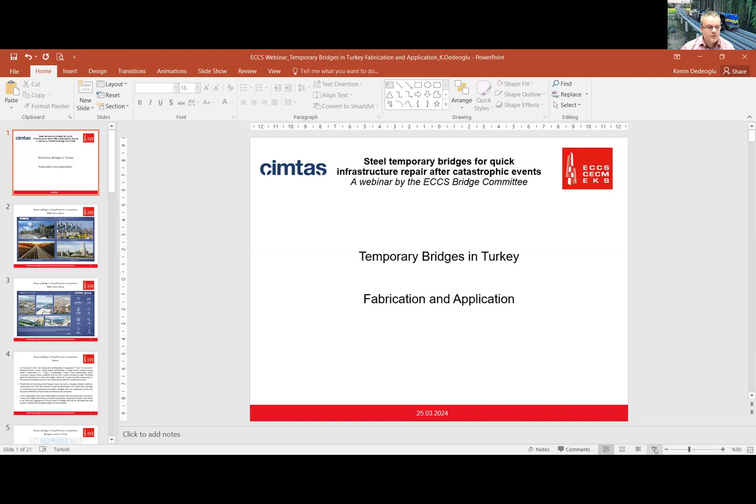Yes, I'll start my presentation now. Let me share my screen. Can you see it now in presentation mode? No, it's the normal mode, not the presentation. Yes, now it's okay. Okay.

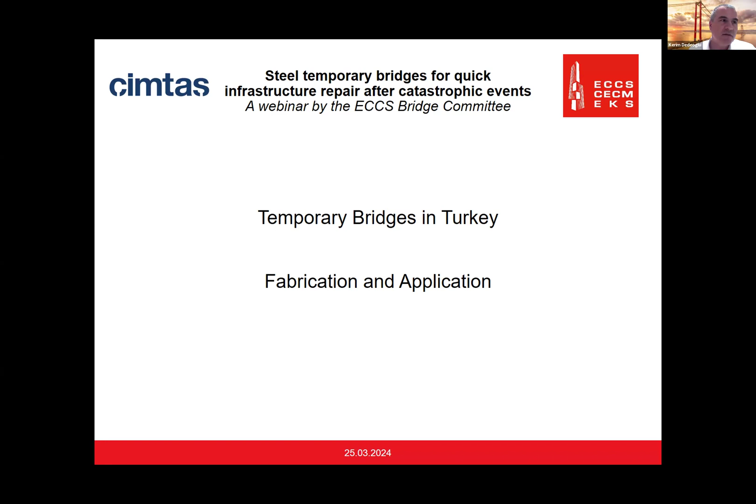Before starting my presentation, I would like to give you brief information about Enka and Çimtaş Group. Çimtaş is the subsidiary of Enka, which is one of the largest and oldest EPC companies in Turkey. Enka is active in oil, gas, and chemicals, power infrastructure, and building works. Enka was established in 1957 and completed hundreds of projects in 53 different countries with more than 60 billion USD historical contract value. Enka ranked 53rd in the ENR top 250 contractors list last year.

Çimtaş was established in 1973 as the largest subsidiary of Enka, with five companies and 7 fabrication shops in Turkey and China, where Çimtaş Steel is the flagship company of the group. We have 5,000 employees worldwide, and total fabrication capacity is around 380,000 tons per year. We are offering engineering, procurement, fabrication, machining, modularization, erection and installation services to top tier customers all around the world.

Çimtaş is also the fabricator of the 1915 Çanakkale Bridge, which is the longest suspension bridge in the world, which you see in the photo behind me.

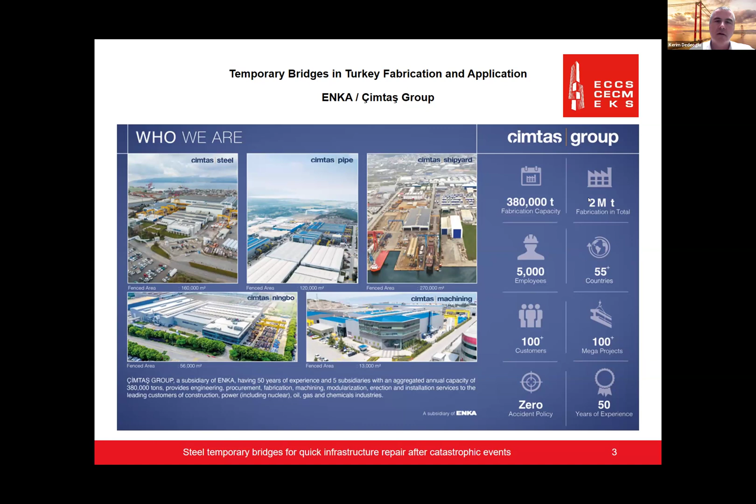On February 6th, 2023, 2 consecutive earthquakes of magnitude 7.7 and 7.6 occurred in Kahramanmaraş, Turkey, as Mr. Yener Güreş also mentioned in his presentation. These largest earthquakes in recent history caused varying levels of destruction in 11 cities in southeast Turkey. Those earthquakes occurred in harsh winter conditions, and the first of them occurred at night,

reminding again the importance of roads and bridges, which are of great importance especially for first aid, first response, emergency response, and logistic support in the days following catastrophic events, not only earthquakes but also floods. In the following slides, I will also give some information about the big floods in Turkey.

Floods, which are becoming more frequent every day due to changing climate conditions, cause great loss of life and property, as well as earthquakes, and cause heavy damage to infrastructure and superstructure systems. Bridges built over waterways are the first structures to be damaged by floods.

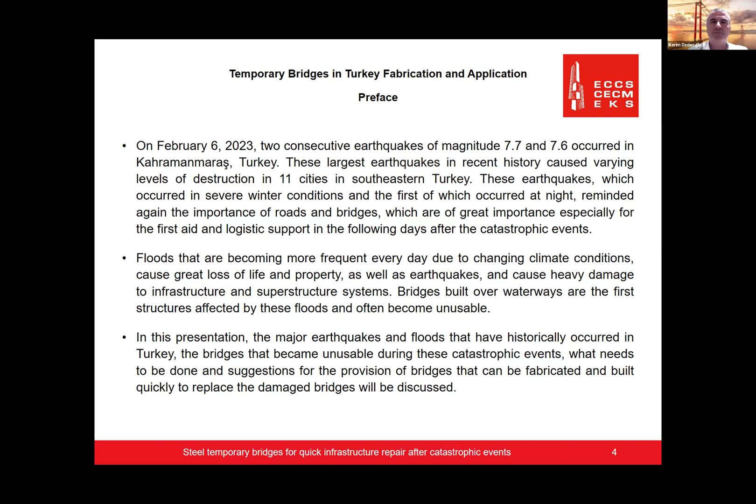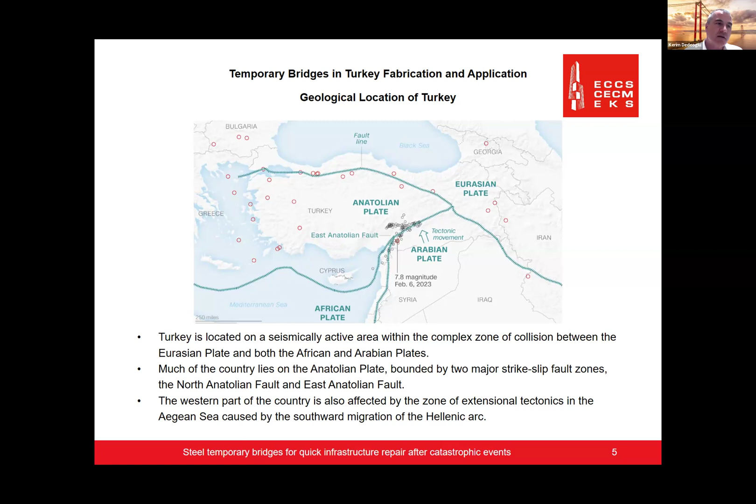Much of the country lies on the Anatolian plate, bounded by two major strike slip fault zones, the North Anatolian Fault and East Anatolian Fault. The western part of the country is also affected by the zone of extensional tectonics in the Aegean Sea, caused by the southward migration of the Hellenic arc. As it can be seen, Turkey is located on the junction of three major and active plates that are continuously pushing the Anatolian plate.

Like the flood in the Marmara region in 2009, 2 bridges on the Bahçeköy-Saray highway were destroyed. In August 2021, floods in the Bartın, Kastamonu, Sinop region damaged 6 bridges in the area. And finally, the recent earthquake in Kahramanmaraş, 7.8 magnitude, damaged almost 75% of the total infrastructure in 11 cities, including bridges.

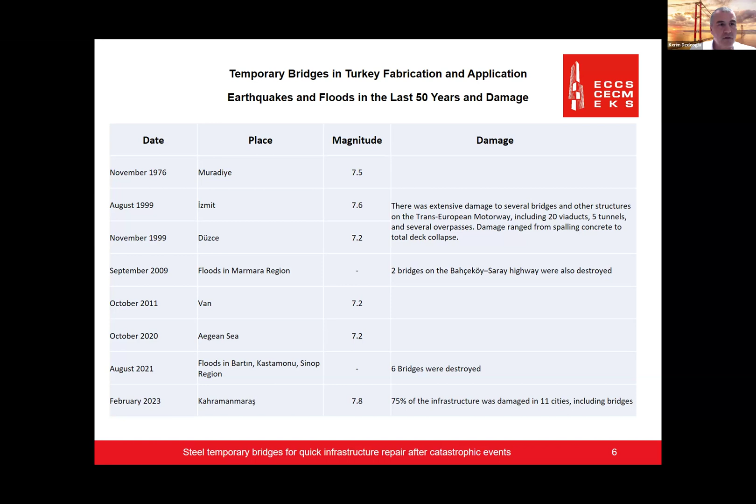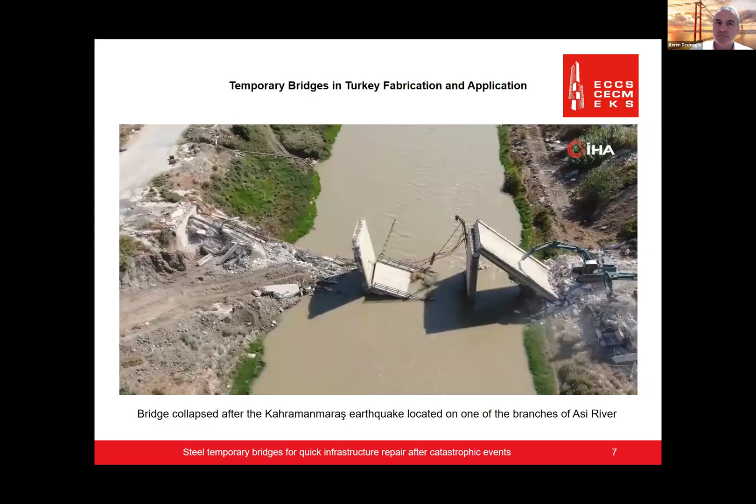In most of the cases, after the catastrophic events, the first response is from the military, as usual, because military forces are well organized and they are spread to the country, so they are the first party to respond in these kind of catastrophic events.

But right after the military response, a civil initiative should take place in cooperation with army or official authorities as required, in order to establish midterm temporary bridges instead of short-term solutions. As we have experienced in the recent earthquakes in southeast of Turkey, even military had some difficulties reaching the site due to heavy damage on the infrastructure.

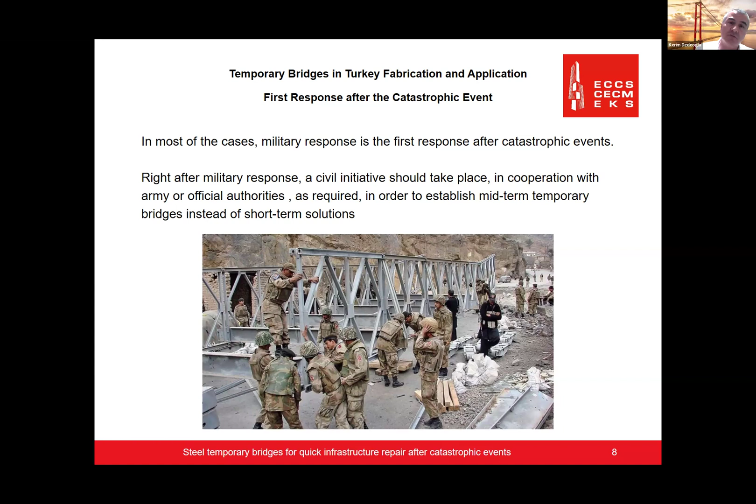Especially earthquakes can be predictable, as historical data and seismological researches help us predict at least a time period and estimated magnitude for an approaching earthquake. Here in this slide, I would like to talk a little bit about the advanced planning before the earthquake or flood.

There are several fault lines that are predicted to create large magnitude earthquakes in Turkey, especially the northern Anatolian fault line, which is passing through multiple populated cities in Marmara region, including Istanbul. This is the fault line which created two massive earthquakes in 1999, causing dozens of thousands of deaths and severe infrastructure damage in the country. Another massive earthquake in the same region is expected soon, as the stress levels have been increasing in the last 25 years.

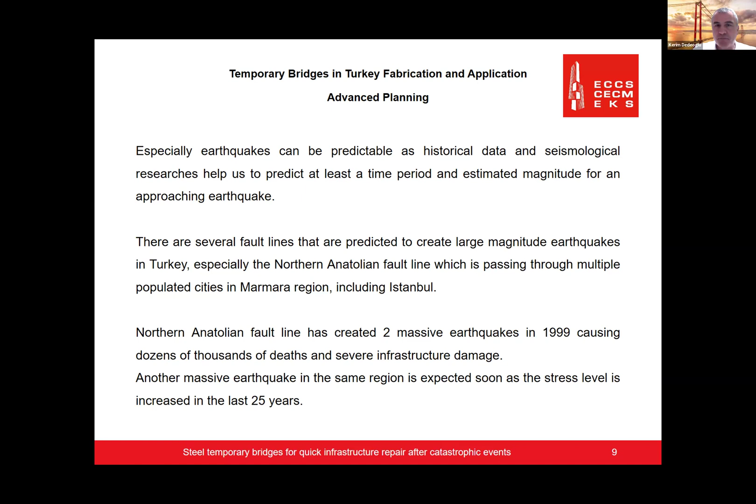So advanced planning and preparation prior to catastrophic events can minimize the impact of the emergency. As related to the emergency response to damaged or collapsed bridges and their repair or replacement, advanced preparation can minimize additional injury and damage immediately following the initial event by providing organized and timely responses to the various responsible individuals and organizations.

In addition, advanced planning and preparation can also minimize longer-term issues associated with damaged areas and construction zones, such as driving safety, public accessibility, and traffic congestion, as well as minimize potential economic impact or disruption of services to the local region. So advanced planning is important for emergency response right after the disaster, but also important for short to mid-term planning in order to continue public services in the affected region.

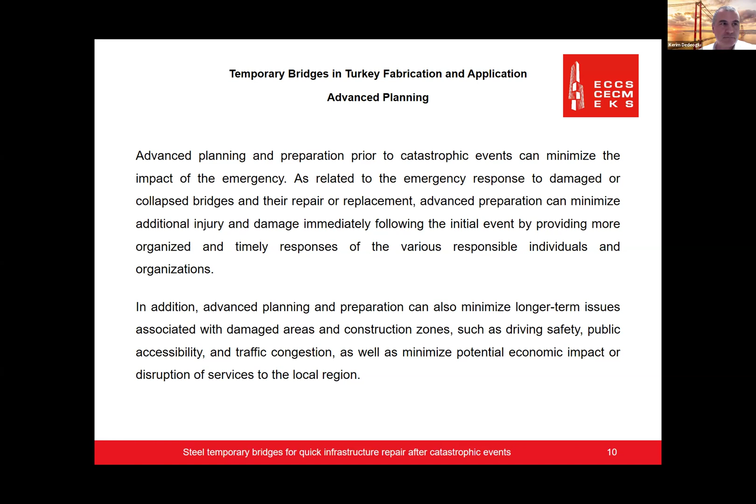Once the critical bridges have been identified and the ranked order established, I mean, the importance of the bridges are listed, an emergency response plan, an ERP, should be developed for each critical bridge. By developing an ERP for each critical bridge prior to an extreme event, initial response times can be shortened by identifying key personnel and organizations along with their contact information for the specific geographic region of the selected asset.

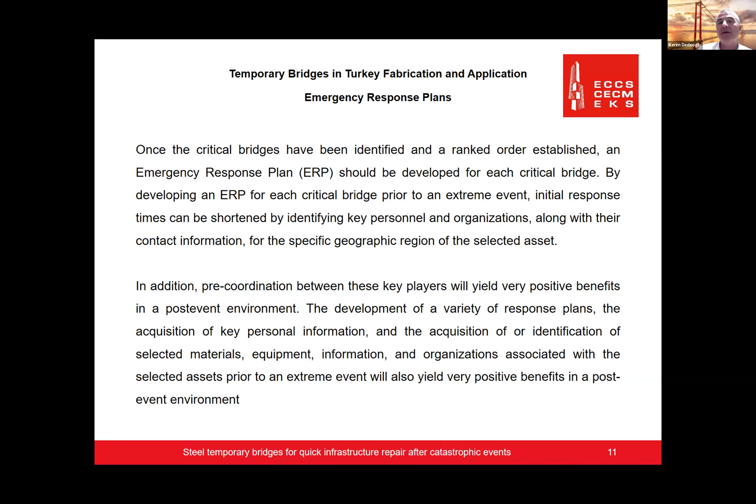In addition, pre-coordination between these key players will yield very positive benefits in a post-event environment. The development of a variety of response plans, the acquisition of key personnel information, and the identification of selected materials, equipment, information, and organizations associated with the selected assets prior to an extreme event will also yield very positive benefits in a post-event environment.

Emergency response plans. Metropolitan Municipality of Istanbul, I selected this one as an example because, as I mentioned, there is an approaching predicted earthquake in this region. Metropolitan Municipality of Istanbul prepared an earthquake master plan for Istanbul in collaboration with some big universities in Turkey, like Boğaziçi University, Istanbul Technical University, Middle East Technical University, and Yıldız Technical University.

The main guiding principle in this plan has been the self-evident fact that while no natural disaster can be prevented from happening, the incorporation of well-formulated planning and technical countermeasures will mitigate damages and losses significantly. This well-organized and prepared plan is more focused on diagnosing the risk levels of existing infrastructure and identifying the structures that need reinforcement and reconstruction.

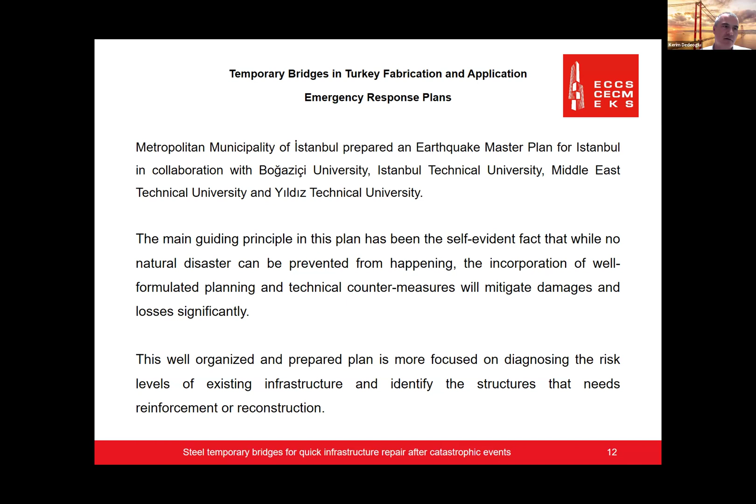As we have experienced in the Kahramanmaraş earthquake last year, even if the structures are strong enough, an earthquake with a high ground acceleration can damage them. If structures, especially bridges, collapse in a sufficiently powerful earthquake, even after the risk level has been determined and the necessary reinforcement has been made, they must be repaired very quickly in order for emergency response and rescue teams to reach the damaged areas.

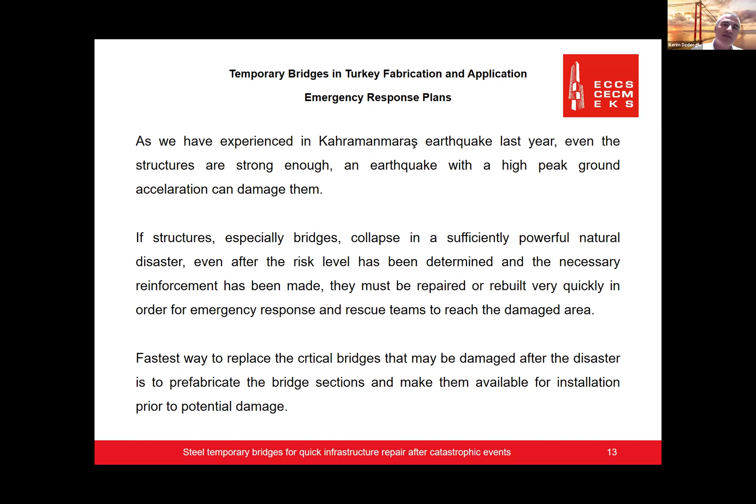One way to replace the critical bridges that may be damaged after the disaster is to prefabricate the bridge sections and make them readily available for installation prior to potential damage. Of course, while identifying the critical bridges to be spared or backed up, we should be selective, as there will be a commercial impact of having those temporary bridges readily available. But I mainly focused on the technical part rather than the commercial part of this issue. So this can be a potential solution for quick response after the earthquake for the fabrication and installation of the temporary bridges.

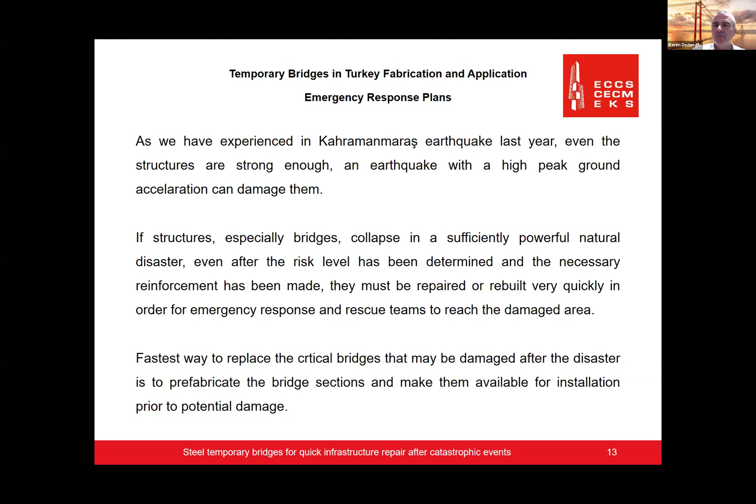There are several types of prefabricated bridges that have been used to serve as temporary bridges during construction, as emergency bridges, and in some cases, permanent structures after catastrophic events. That's why I call them short to mid-term solutions, because prefabricated bridge elements and systems can also be used as permanent structures after the catastrophic event. In all cases, the prefabricated bridge or bridge components are intended to be quickly and easily assembled on site, minimizing the time required on site to construct or restore the bridge.

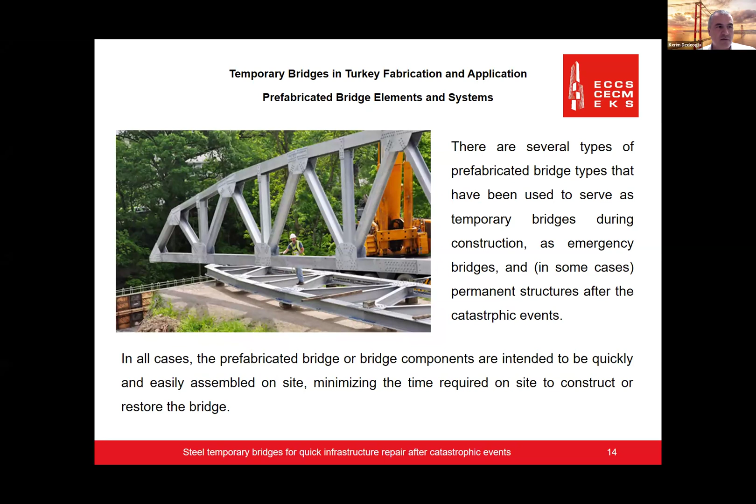Here in this slide, I tried to list and visualize some advantages of prefabricated bridge systems. The first one is improved project delivery time, as most of the parts are prefabricated at a fabrication shop. Longer durability. Reduced weather-related time delays, as the installation is relatively faster. Improved site constructability, as all connections are designed as bolted and pinned connections. And also, as a result of the bolted pinned connections, on-site construction time is reduced in these types of temporary bridges.

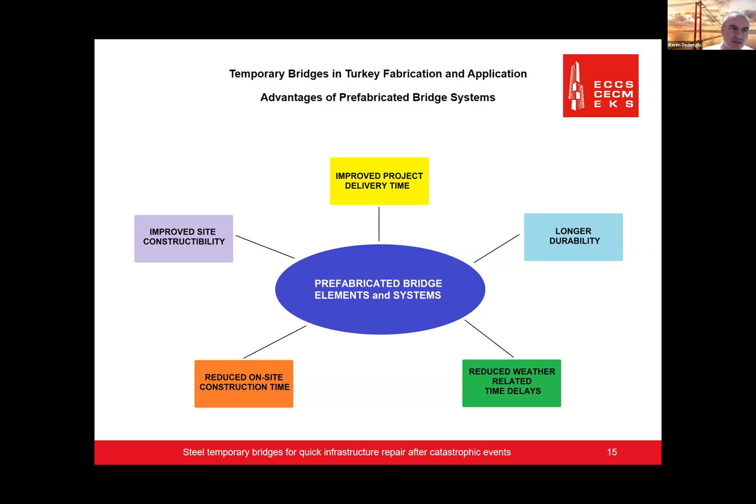Panelized truss systems are a kind of temporary bridge, which are prefabricated bridge systems. After identifying the risky bridges and viaducts in the emergency response plan studies, a panelized truss system bridge can be designed for each specific crossing, rather than a standard temporary bridge. As we have listed those critical bridges and crossings in the emergency response plan, specifically designed bridges for each and every crossing can be fabricated before the catastrophic event occurs. Panelized truss systems are composed of prefabricated truss panels that are bolted and pinned together and floor beams that span between the trusses. Here in this slide, you can see a sample of this panelized truss system bridge.

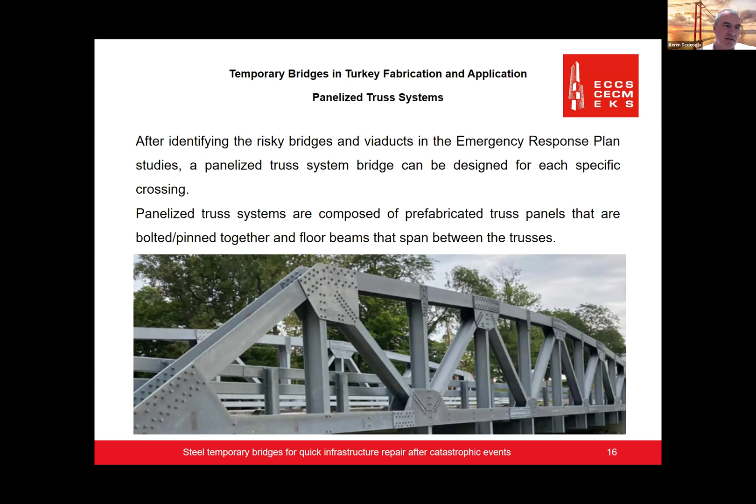Here I would like to talk a little bit about the supply flow of the temporary bridge. First, we need to identify the risky bridges through the emergency response plan. Then the design of the prefabricated bridge system should be done. After the design is completed for this specific crossing, the engagement with the fabricator shall be done through an RFQ, request for quotation process, and all these technical details should be completed. Once the fabricator is selected, procurement, fabrication, and delivery of the temporary bridge is to be done. After the fabrication is completed, the bridge should be stored near the installation site before the catastrophic event occurs.

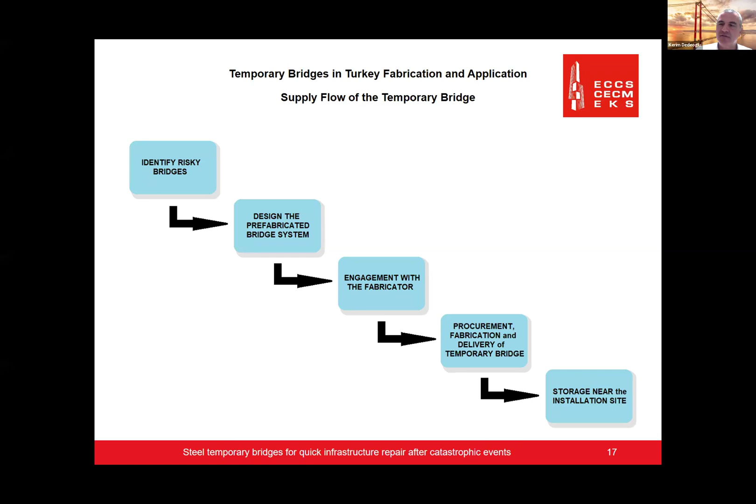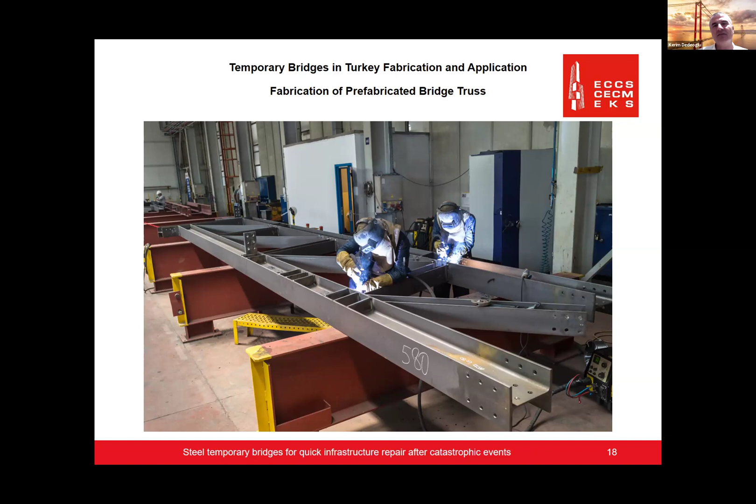Here you see a sample photo taken in our Çimtaş fabrication shop in Gemlik of prefabricated bridge truss fabrication. This is an example of a relatively heavier truss system, but while designing the prefabricated bridge, the top chord, bottom chord, and the bracings can be separated with bolted connections in order to avoid the need for heavy installation equipment at the installation site. Here is another sample photo of a prefabricated bridge truss taken in our shop again.